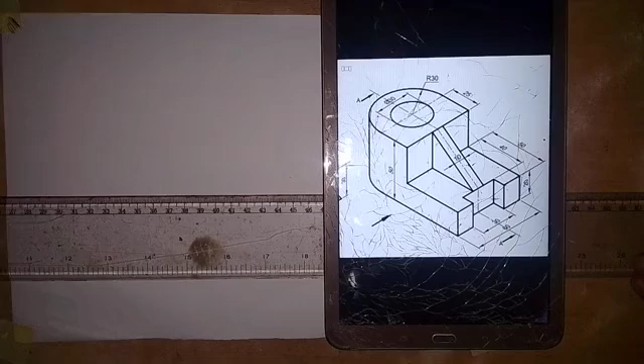Here we're going to be working on the construction of the sectional view of this object. Okay, so we have the cutting plane AA. So we have it moving in this direction. So it goes like this. So it comes down like this and it goes here. So then the arrow is pointing in this direction. This is also pointing in this direction.

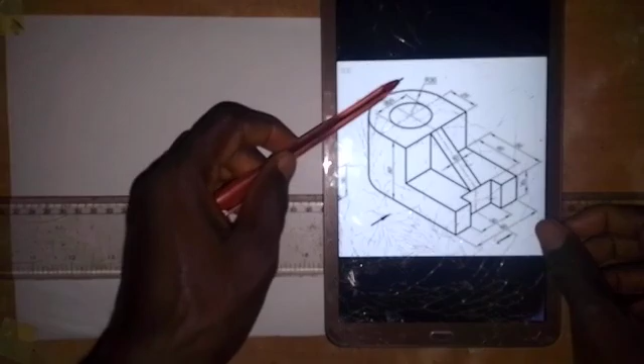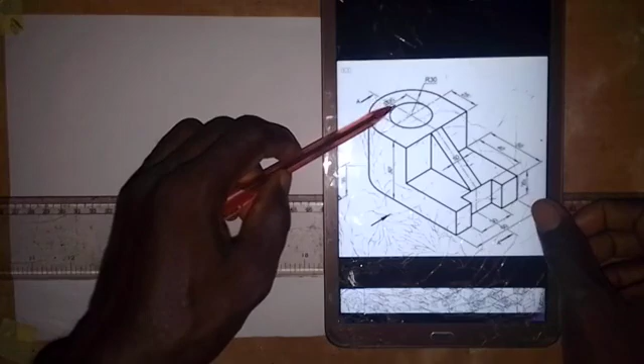What does that imply? So we have to remove this part and then we want to see what we have left on this surface. So that's what we are going to do. Alright, so on the object, the cutting plane touched this part, which is the solid part. So this is a hole. So the cutting plane does not touch this surface. So we are going to leave this surface unhashed, while the solid part that we have here, we are going to hash it. Then this is also a solid part that the cutting plane touched. We are going to hash it.

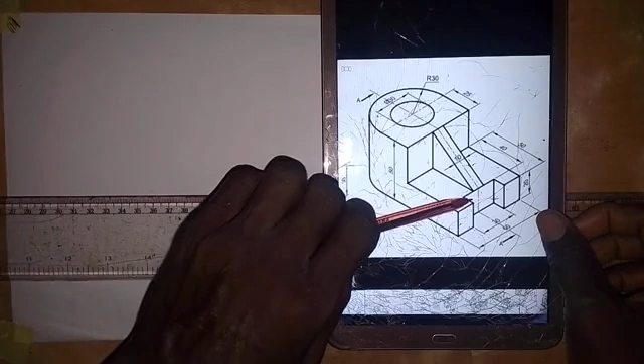And then for the web, so this shape here, or this component on an object, is called a web. And when the cutting plane goes like this on the web, we leave the surface of the web unhashed. Okay, so let's take note of that. So this is also a solid part that the cutting plane touched. We are going to hash it. But this surface here, the cutting plane does not touch it. We are going to leave it unhashed.

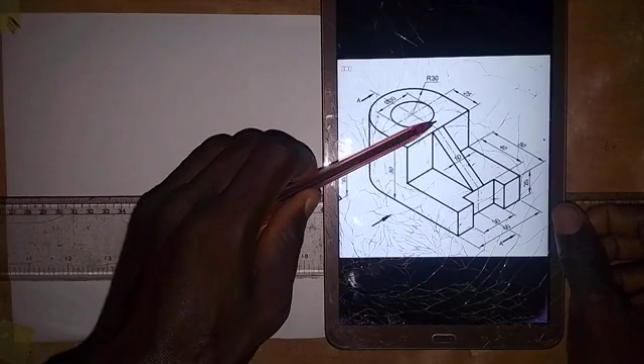Alright, so other things that we have to look at here are the dimensions. So the radius of this curve is 30 millimeters. And then the diameter of this circle is 30 millimeters, while the distance from this edge here to this point is 25 millimeters. It means that the length from here to this end here is 30 millimeters. So the height from here to here is 50 millimeters, while the distance from here to here is given as 20 millimeters, and distance from here to here is given as 50 millimeters. And from this point on the web to this point, the distance is 40 millimeters.

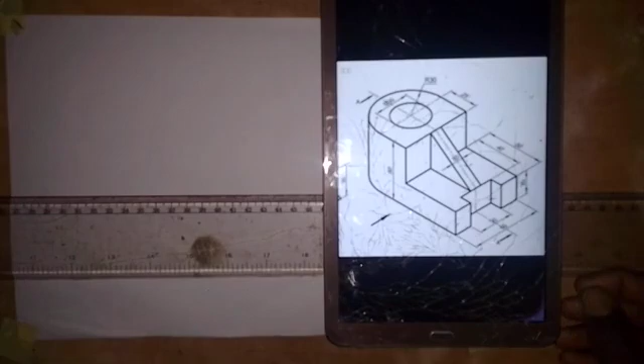So let's start and see how the construction of the section AA of this object can be made. So what we are going to do first is to draw a horizontal line. So we have horizontal line from this point, and then at this point here I'm going to draw a vertical line. So here we have the vertical line. Okay, so I'm going to take a measurement of 20 millimeters from here.

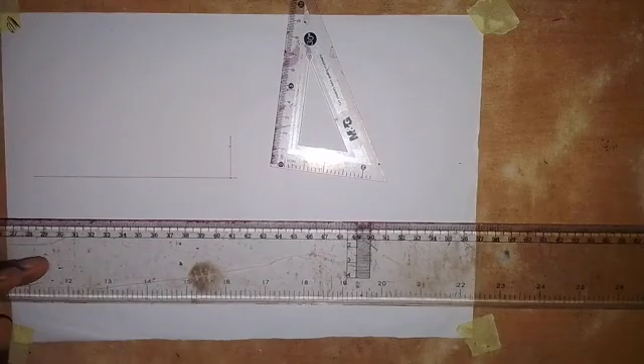And another thing that I need to talk about here is total length of the object. So what's total length of the object? We have it to be 50 plus 55. So 50 plus 55, that will give us 105. So I will take a measurement of 105 on this line. So we have 50 here, so for that of 50 and that of 40, I will take it at once. So from here to here is 40. Then this is 100. I need to add 5 to it, so this is 5.

So at this point I'm going to draw a vertical line here. So we have the vertical line drawn like this, and at this point I will also take a vertical line up, so that I can get the end of the web. At this point I will also draw a vertical line like this. Alright, so for the one that we have as 20 millimeters here, I'm going to draw a horizontal line to touch this line. So we have this now.

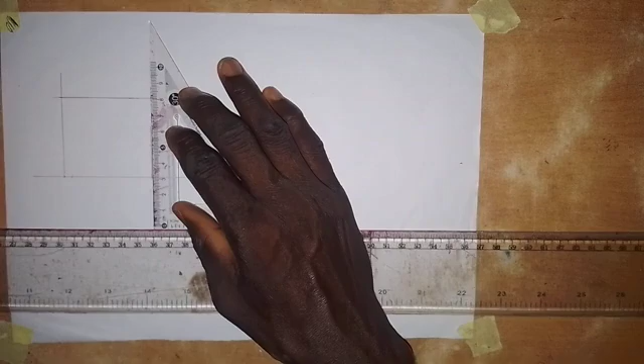Okay, now for the end here, where we have the height of that end part to be 50 millimeters, I will draw horizontal line here. So I've taken a measurement of 50, so I will draw horizontal line forward. Okay, so at this point I'm going to connect this together like this. So the elevation of the web, which is a triangle, we just join this point together. So I'll make it a thick line at once, like this.

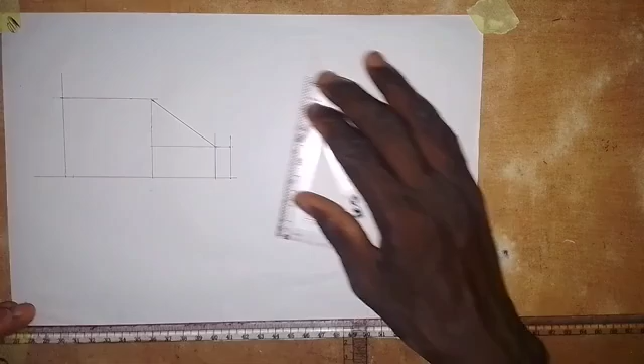Okay, so we have this for the web. So then this line will be made a thick line, this line will be made a thick line, and then this will also be made a thick line. Okay, and this will be made a thick line. That is for the rectangle that I said that we are not going to hash. Okay, so let's leave this for now, we'll come back to it later.

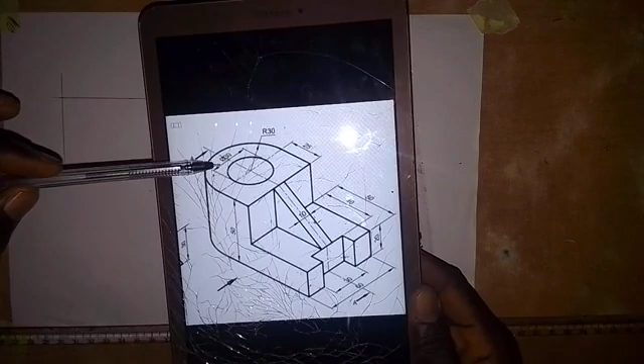Let's come and work on this back part, where we have this particular shape. So here you are not going to have a curve, you are going to have a straight line. So this is going to form a straight line. So that's what we have drawn here. Okay, now as we have that, the radius of this curve here is 30 millimeters, and we have diameter of this circle to be 30 millimeters.

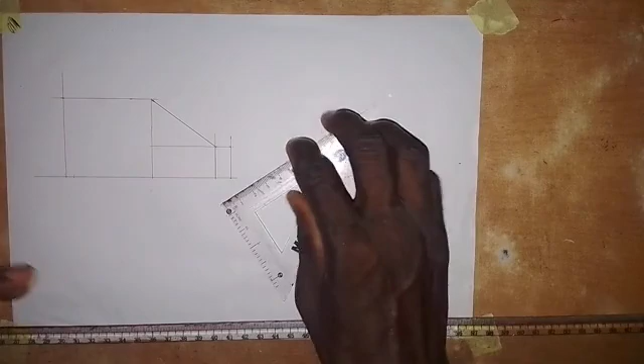So thickness from here to here will be 15, because from here we have this to be 15, and from here to here is 15, so making 30. Okay, so we have to take that 15 millimeters. So we come to this end here and we take 15 millimeters forward. That's 15 millimeters. Then the center of the hole within that particular part, so we also take 15 millimeters forward.

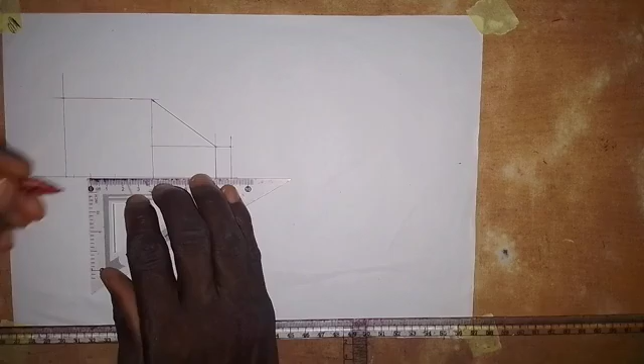So let's draw the vertical center line. So here we have vertical center line. Through this point we have a vertical center line like this. Okay, so then this line will be made a thick line for the hole, so we have to make this a thick line like this.

Okay, then the rest, from this point to this point, we also have it to be 15 millimeters. So we have to take that measurement of 15 millimeters. So this is 15 millimeters here. So we also make it a thick line. So we draw a vertical line here. Okay, so we have this now.

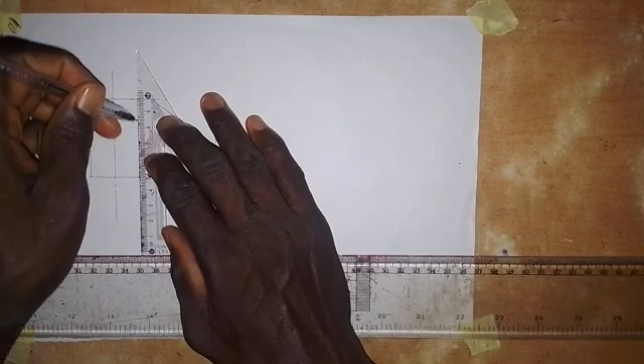So looking at what we have here, all that we need are already in place. So let me show you what we have. The solid part that we have here is the thickness from here to here. So the hole as it looks in the sectional view, that is what we have here. The cutting plane does not touch it. We are going to leave this unhashed.

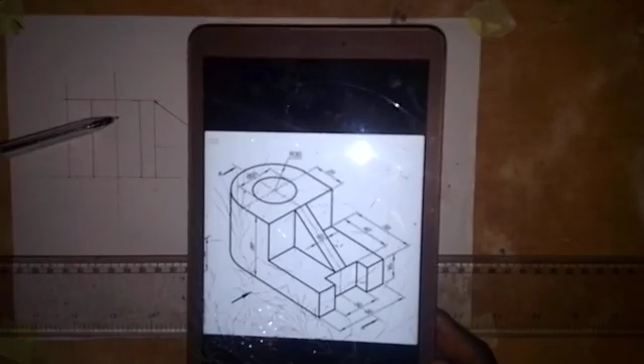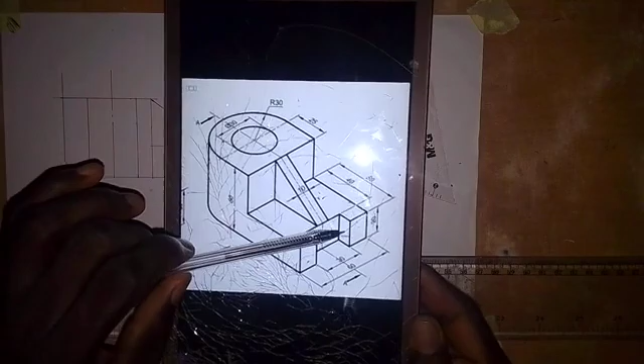So the cutting plane touches this part, which is the solid part. We are going to hash this surface. The web is not going to be hashed. As I said, when the cutting plane goes on the web like this, we leave this surface unhashed, and then this part on this surface will be hashed. So we are going to hash this. This surface will not be hashed because it is the rectangle that the cutting plane does not touch.

Okay, so I want to bring out the visible outlines and edges of the object. Then we come and hash the surfaces together. Alright, so the next thing that we have to do is to hash the surfaces. We are going to hash the solid part. So we hash this surface, and then we also hash this surface.

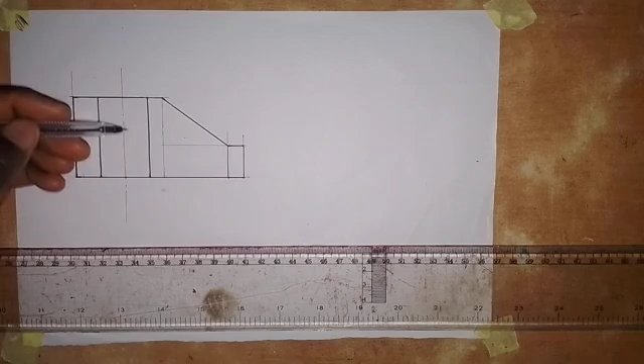Okay, so this will be left unhashed because it's the web, and this will be left unhashed. The cutting plane does not touch the surface, and also we have to leave this unhashed. The cutting plane does not touch it. It's a hole within the object. So let's do the hatching. The hatching lines are drawn with a 45 degree set square, equally spaced. Okay, so that's what I'm doing here.

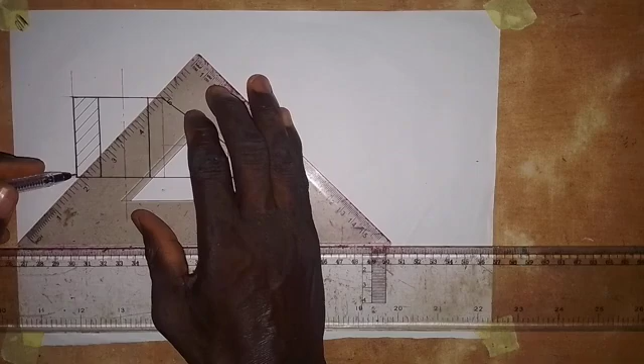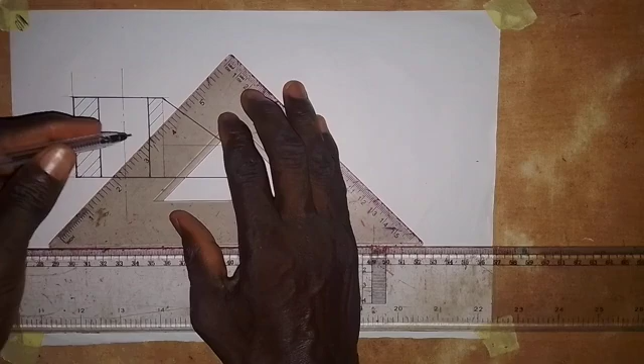Okay, so we are not to hash the web, so we leave it unhashed. So I've left it unhashed. If you mistakenly hash it, you'll be penalized for that. So just keep that in mind.

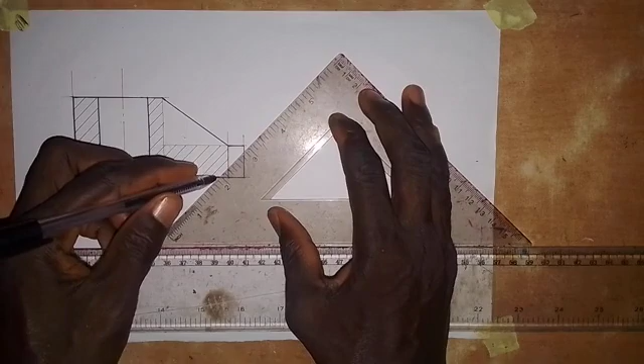So when the cutting plane goes on the web like that, as we have cutting plane AA on the object, you leave the web unhashed. Okay, alright, so we're almost done with the hatching. So let's add one more here. Alright, so this is the sectional view. This is section AA. It's as simple as I've done it here.